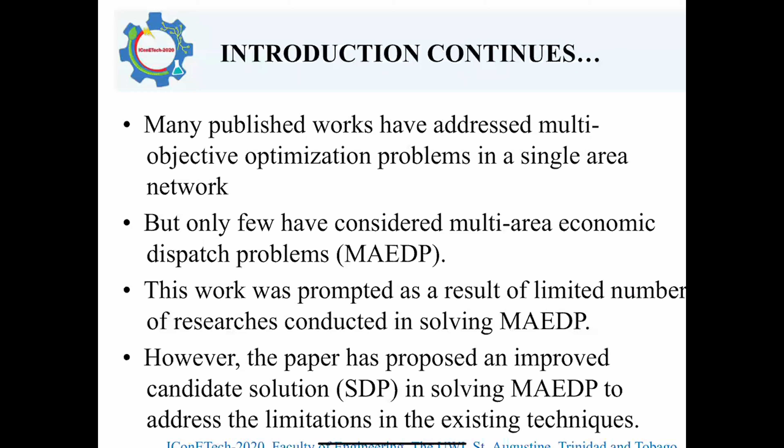This work was prompted as a result of the limited number of researches that has been conducted on multi-area economic dispatch. A lot of published work has addressed multi-objective economic dispatch problems on a single area network, but only a few have been able to consider the multi-area economic dispatch problem.

We hereby propose an improved candidate solution in solving multi-area economic dispatch problem in order to address the limitations in some of the existing techniques.

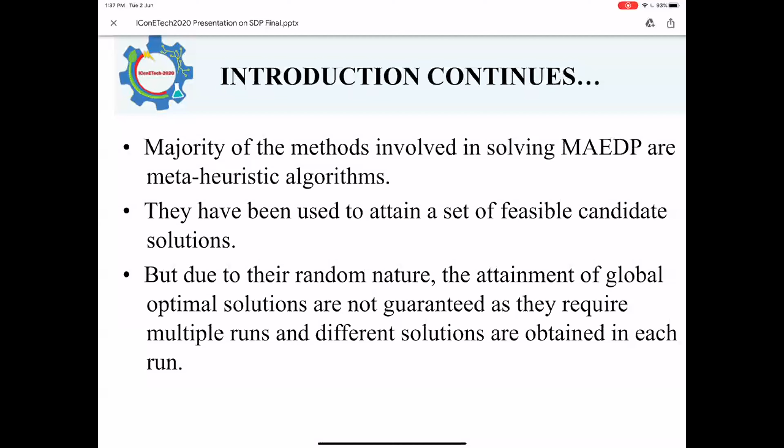As for the methods involved in solving multi-area economic dispatch, the majority are meta-heuristic algorithms. Some of them are evolutionary algorithms, and they have been used in attaining a feasible candidate solution. But due to the randomness in all these algorithms, attainment of the ideal optimum solution is not guaranteed, as they require multiple runs and different solutions are obtained in each run.

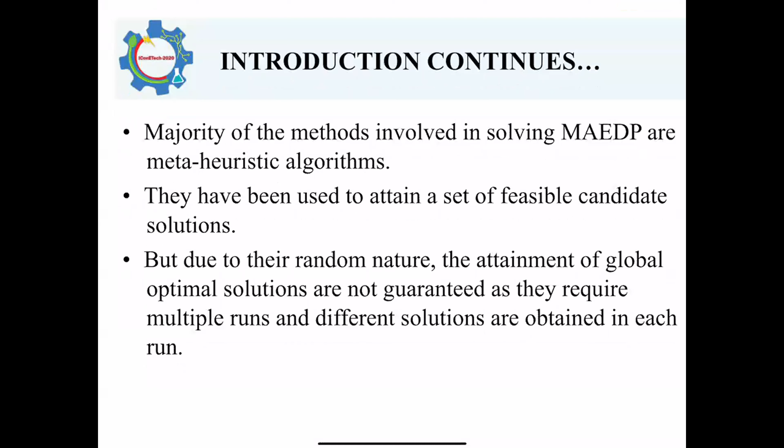Whenever you continue to run these algorithms, you continue to obtain several sets of solutions over several runs. This requires us to keep statistical data by looking for the best optimum value and the worst optimum value, and the ideal optimal solution is not guaranteed in this case.

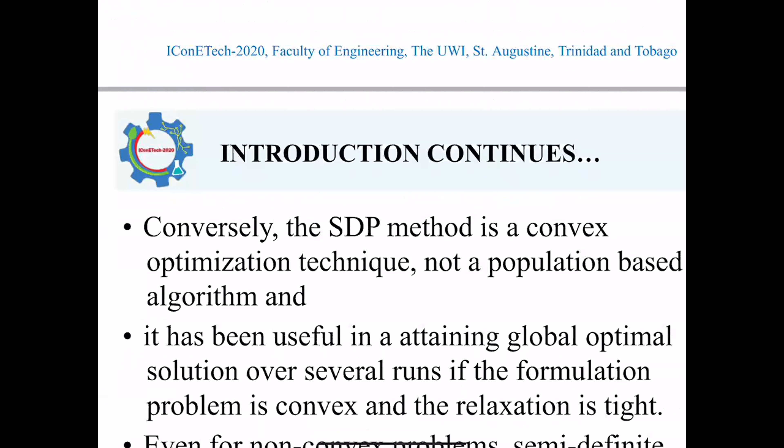As for semi-definite programming, it is a convex optimization technique, not a population-based algorithm. It has been used in attaining a single global optimum solution over several rounds if the problem is convex and the relaxation is tight.

Even for a non-convex problem, the semi-definite relaxation of this problem can be converted to its convex equivalent, in order to achieve a computable bound for the problem.

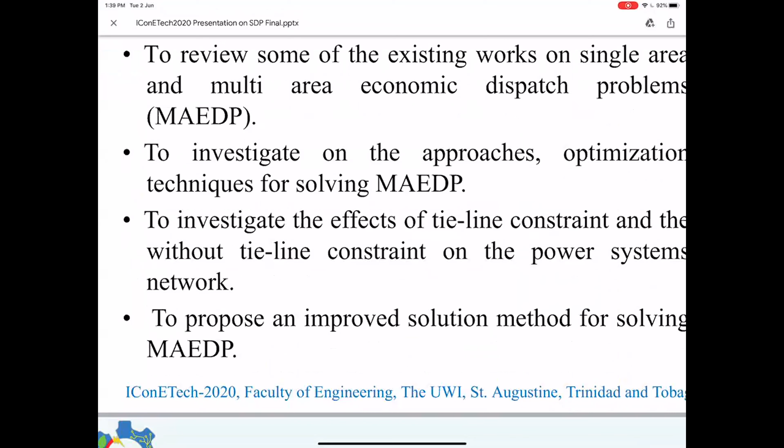The objective of this study is to review some of the existing work on single area and multi-area economic dispatch problems, and also to investigate the approaches and optimization techniques for solving multi-area economic dispatch problems.

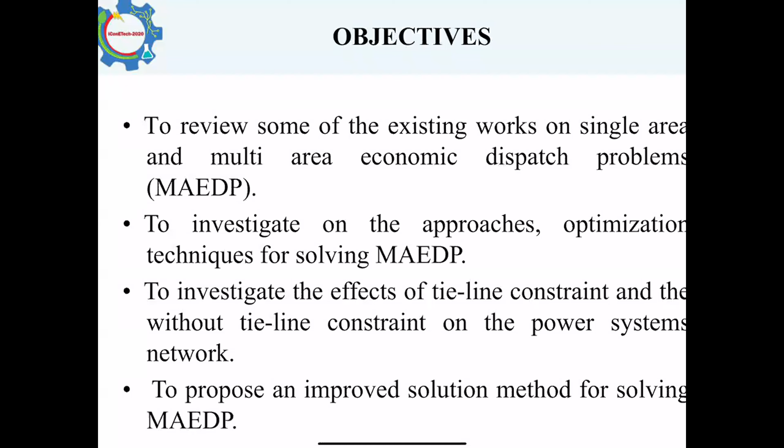At the same time, we also investigated the effect of tie line constraints, comparing cases when the power network is incorporated with a tie line versus when it is not. So we also propose an improved candidate solution for solving this multi-area economic dispatch problem.

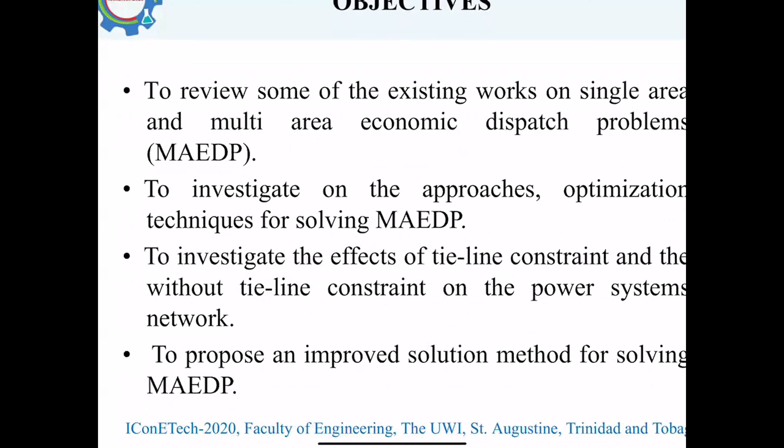I'm sorry, this is too large, unfortunately. As for SDP, SDP is a convex optimization technique that is used to minimize objective functions subject to some combination of constraints which has positive semi-definite symmetry.

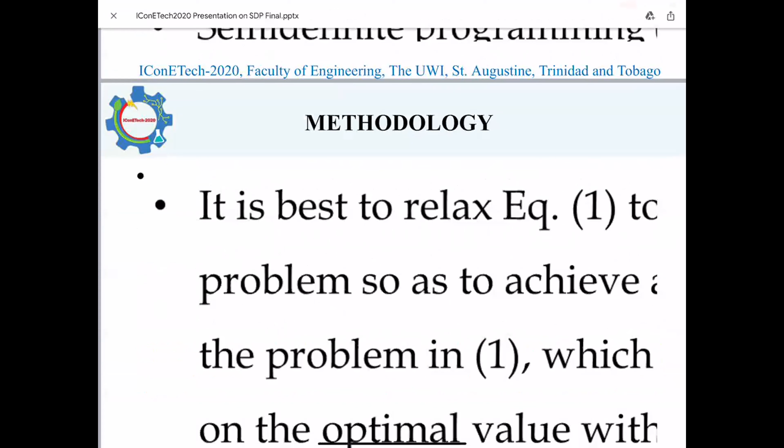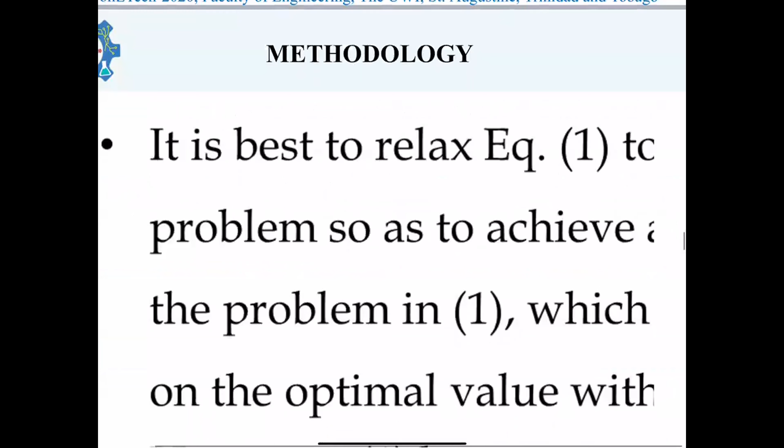Sorry, hello, the organizer? Hello? Sorry, yeah, I think you can hear me. Yes, we hear you. The resolution of this slide is just too high, I don't know. I think there was some loss of information. I have some information here, so apologies, I have to look for an alternative. Try to...

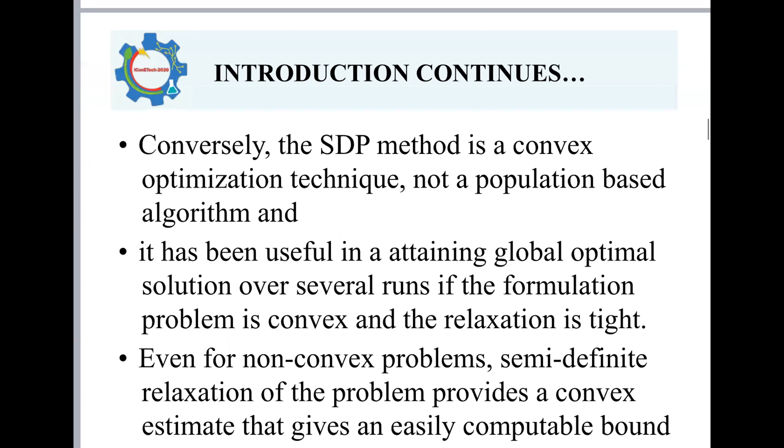I think this guy is a little bit better. I think this example, can you see this please? Yes, we can, thank you very much. I think this is the exact PowerPoint which I was trying to upload initially.

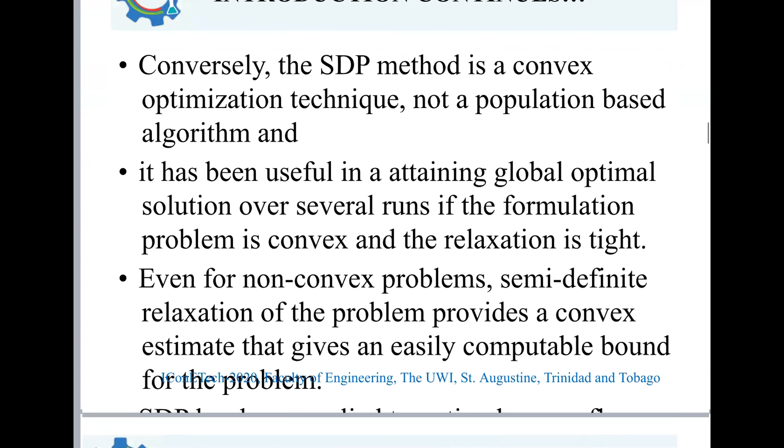Unfortunately, I have something missing. I don't know, maybe the PowerPoint was disarranged when trying to upload. So normally, what is concerned about this use of semi-definite programming, it has to do with whenever our objective function is not in convex form, the optimization problem will be very difficult for our algorithm to solve, and an ideal optimum solution is not even guaranteed when the objective function is not in a convex form.

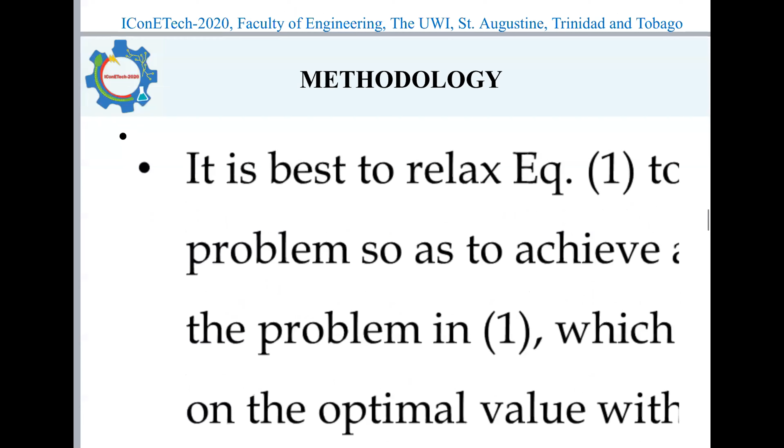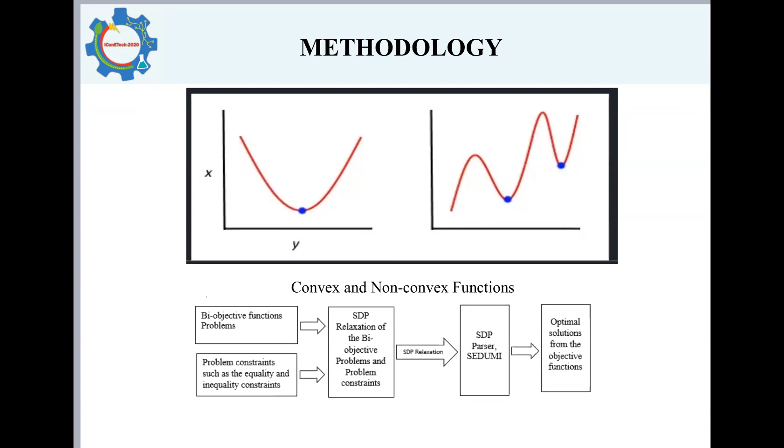So basically our procedure in our subsequent paper has to do with considering a bi-objective function subject to some constraints, which are equality and inequality constraints. Both the objective function and the constraints will be converted to the SDP format by relaxing these problems.

This SDP relaxation will be passed to an SDP parser, which is SeDuMi. There are two boxes involved that actually help us convert this. The format that we obtain from this SDP relaxation is initially a primal solution.

So we need to convert this set of problems to a dual form, because the solution obtained from a primal solution gives us a weak solution. It's necessary for us to convert this problem to the dual form of the semi-definite objective functions. So finally, we obtain our optimum solution from our objective functions.

So we have some preliminary analysis and simulation which were conducted. We plan to conduct simulation on the IEEE 4-area 16-unit network, and also on the IEEE 4-area 40-unit network, in order to validate our algorithm.

There is also some other information which we're missing from here, I really don't know why this is happening. We also plan to compare the results to investigate different cases when the system is incorporated with tie-line transfer capacity, and when the system is without tie-line transfer capacity, in order to validate our algorithm.

This particular method, the result obtained from the minimum objective function, will also be compared with some of the existing methods reported in the literature review. So we have some preliminary results that I would like to show.

Okay Doc, yes, I'm almost done, just a few slides, maybe two slides before the reference. So I have these preliminary studies here. When we consider a 16-unit network, a 4-area network system, these are some of the optimum power values that are generated.

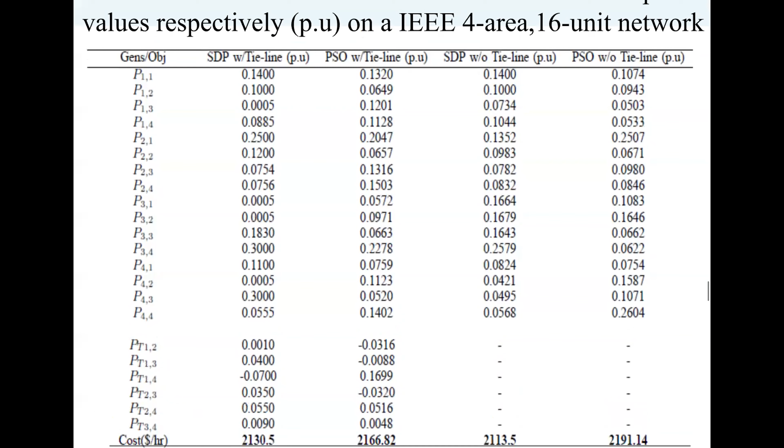Like I said, the main target of economic dispatch is minimization of the fuel cost. You can see that when the system is incorporated with tie-line capacity, we're able to obtain a minimum value compared to when particle swarm optimization is used. In the case when the tie-line is not incorporated into the optimization module, there is a little drop in the fuel cost compared to the optimal value obtained from particle swarm optimization techniques.

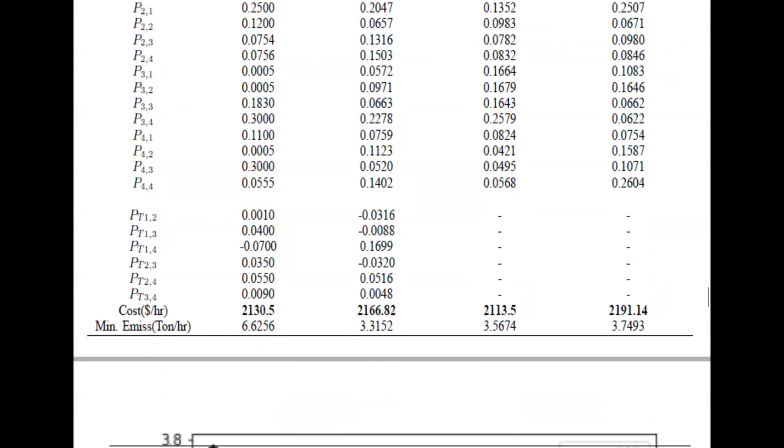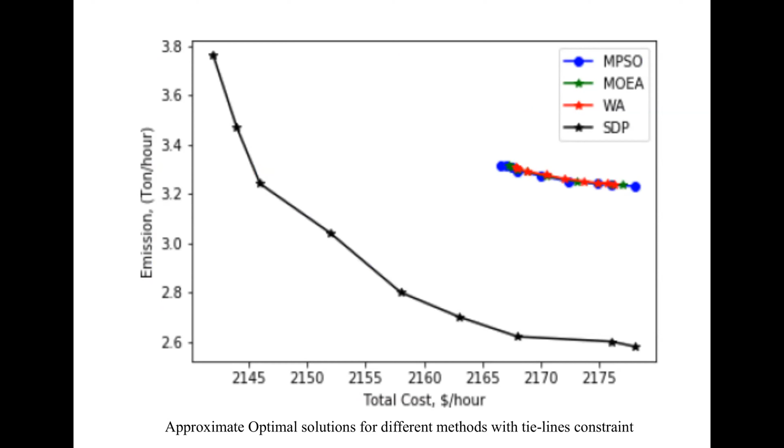So these are some of the preliminary results. We have the Pareto front results obtained from the use of SDP compared to these evolutionary algorithms. We can see that at a certain time we're able to obtain a minimum fuel cost compared to these other algorithms. I'm sorry, I have some of the references, but full details are in the full paper.

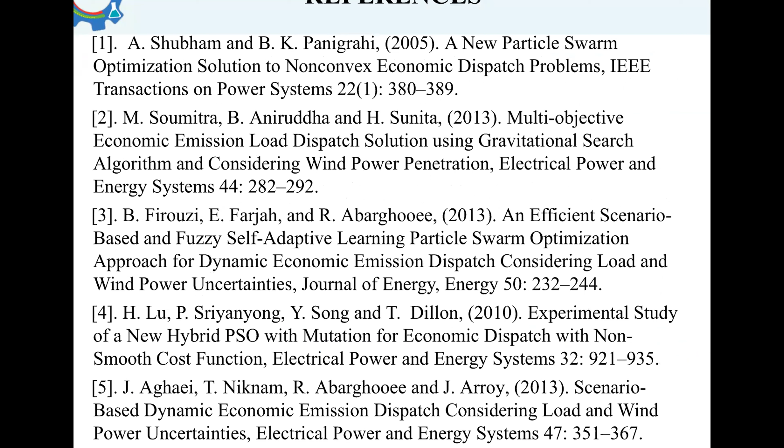So I want to use this moment to apologize for what has happened. I want to welcome any questions.

Okay, thank you, thank you Dr. Alli. Yes sir. I understand the technical difficulties, but the presentation was great, very informative. I believe we have a question, but I would rather wait for the questionnaire and just contact you by email. Okay, thank you. Yes, I will definitely make my email available. There will be a lot of questions. It's a nice presentation. Okay, appreciate your time. So, you're most welcome, bye. So I am now going to